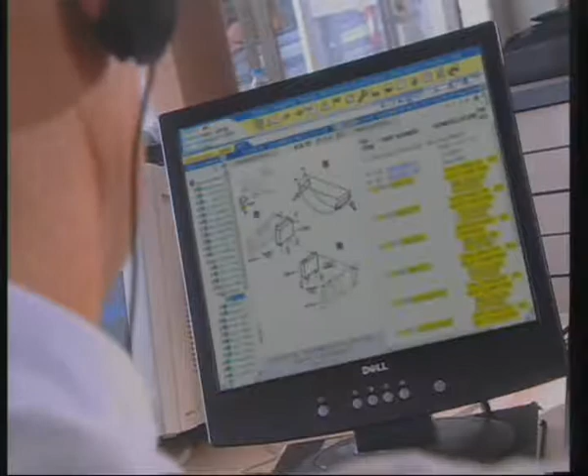Delays and cancellations can be minimized by utilizing proper troubleshooting techniques and the efficient use of the aircraft maintenance documents. The documents include the troubleshooting manual, the aircraft maintenance manual, and the illustrated parts catalog. The troubleshooting procedure begins with a logbook entry or a post-flight report.

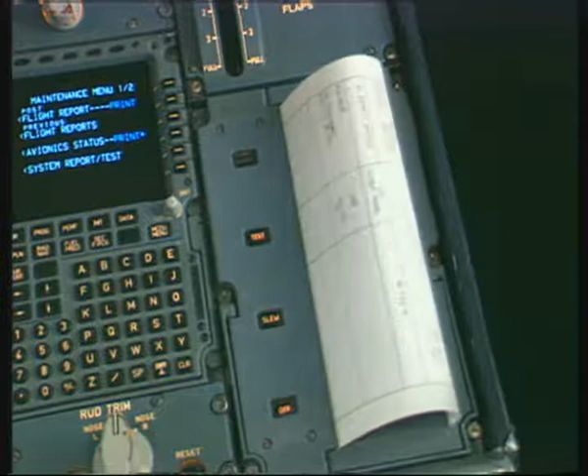The post-flight report data is presented in two different formats. The wide-body aircraft data is displayed in a horizontal format. The post-flight report data for the single-aisle aircraft is printed in a vertical format. The post-flight report identifies the aircraft and flight number.

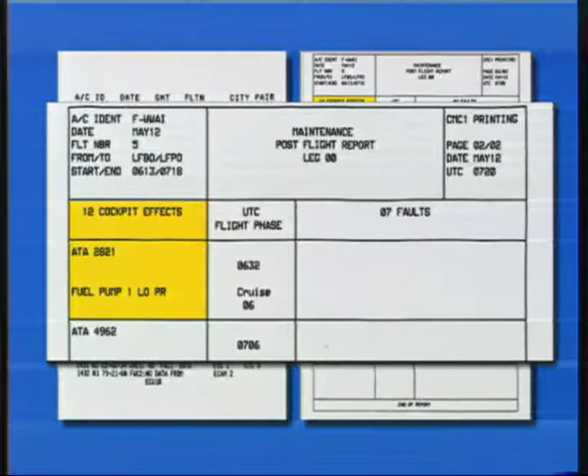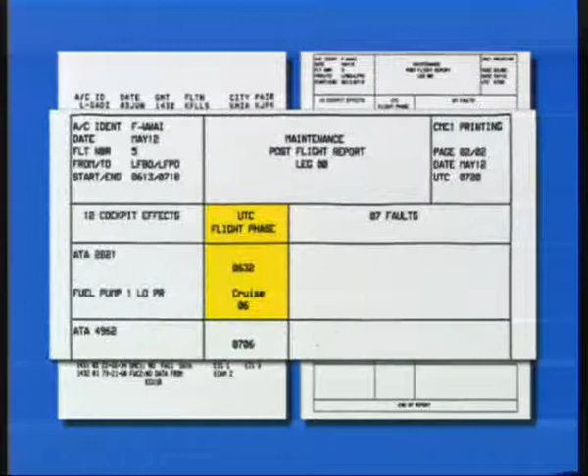The fault data includes the cockpit effects, which identifies the ECAM warning and the troubleshooting manual entry reference, the universal time coordinated and the flight phase in which the fault occurred, and the faults which were detected by the Central Maintenance System computer.

The CMS fault data includes the maintenance manual reference, the line replaceable unit and its functional item number, and the system component which generated the fault message. Additional systems that may have detected the fault or may be affected by it are listed as identifiers.

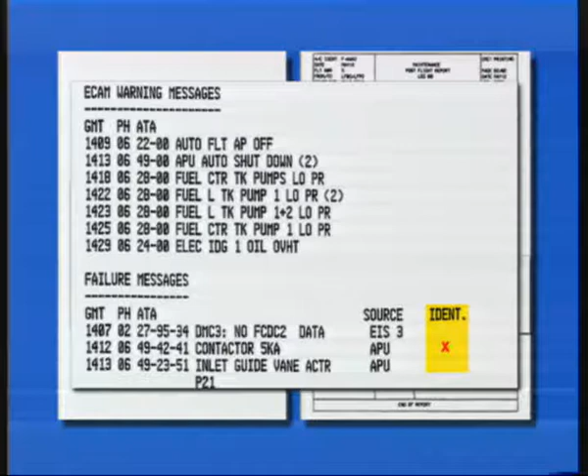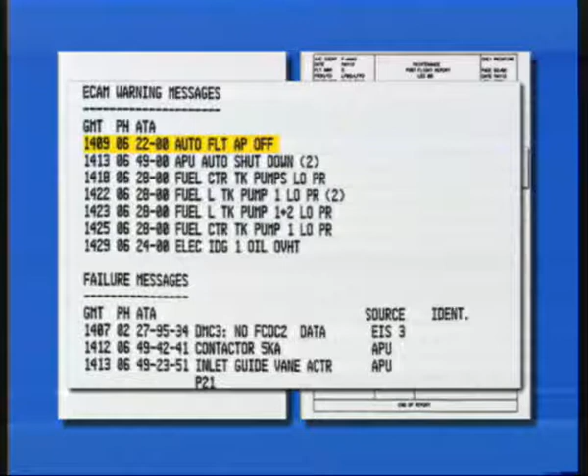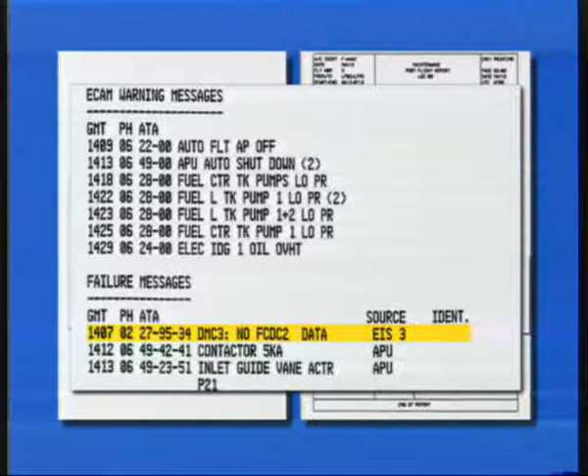The post-flight report may list a cockpit effect and no associated fault data, a cockpit effect with associated fault data, or fault data with no associated cockpit effect. The troubleshooting procedure for the single-aisle aircraft is identical to that of the wide-body aircraft.

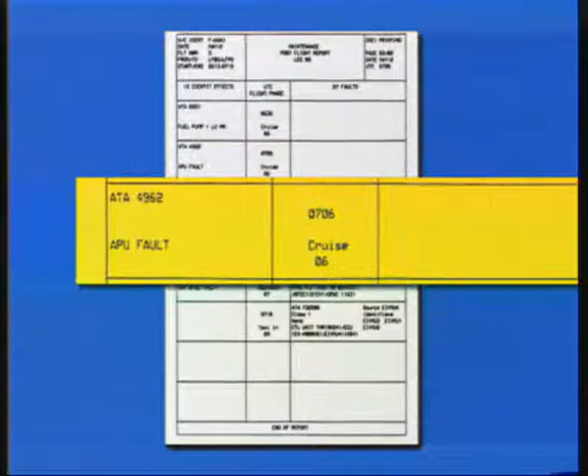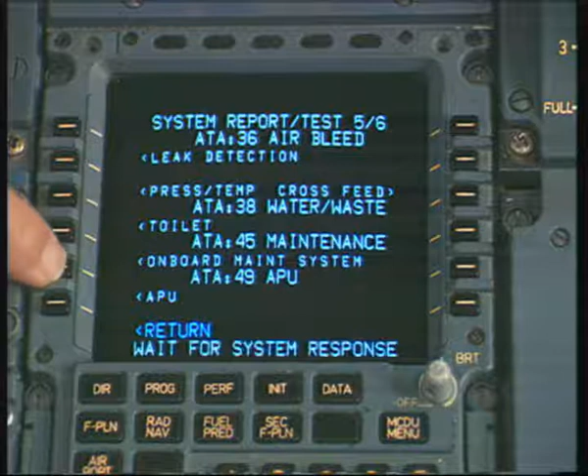The ground engineer retrieves the post-flight report from the aircraft printer to begin the troubleshooting procedure. The post-flight report contains data from the central maintenance system or the centralized fault display interface unit, which will assist the engineer in identifying and isolating system faults. The fault data is compared with a pilot logbook report. Fault data history may be obtained from the affected system computer through the use of the MCDU CMS data link system.

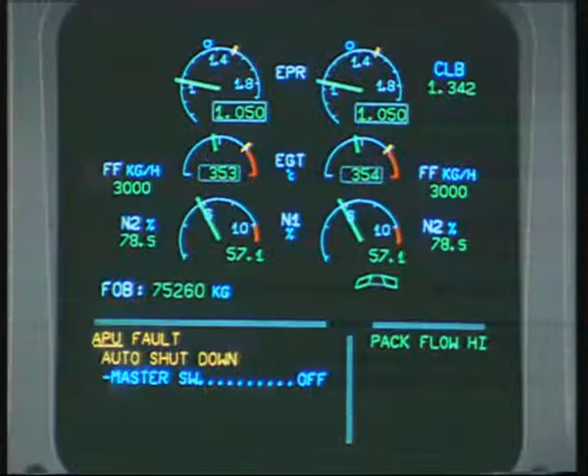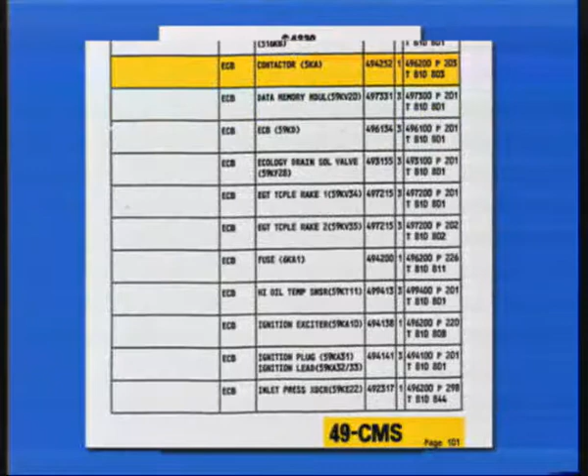The entry point into the troubleshooting manual may be determined by an ECAM warning, a fault message generated by the central maintenance computer or by the centralized fault display interface unit, local warnings or observations by the flight crew or by maintenance engineers, or by an in-op system or maintenance status ECAM display.

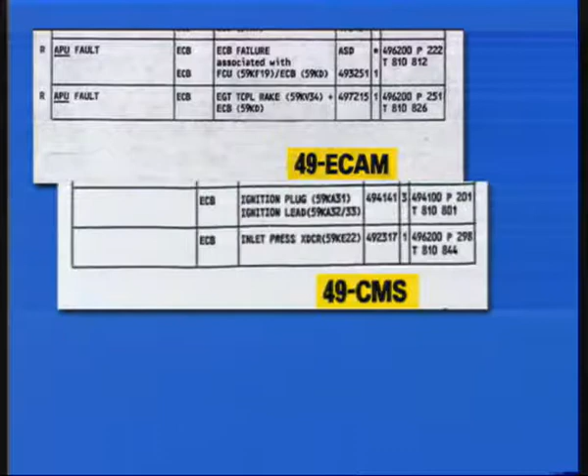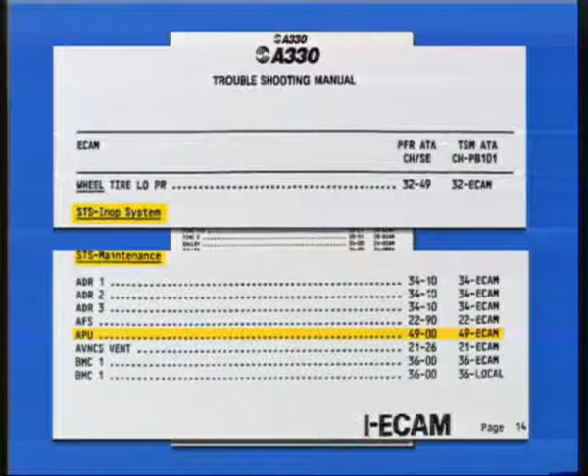The ECAM warnings, CMS fault messages, observations and status messages are listed in their respective troubleshooting manual index. The index directs the engineer to the fault symptoms sections located in page block 101 of the relevant aircraft system. Page block 101 ECAM section contains the list of ECAM warnings, identifies the source of fault messages and correlates ECAM warnings with associated CMS fault messages.

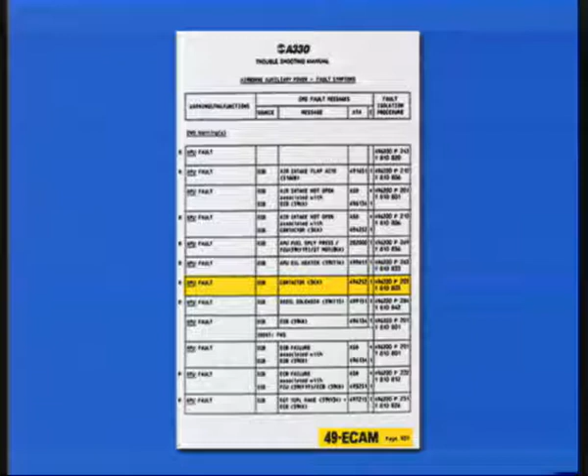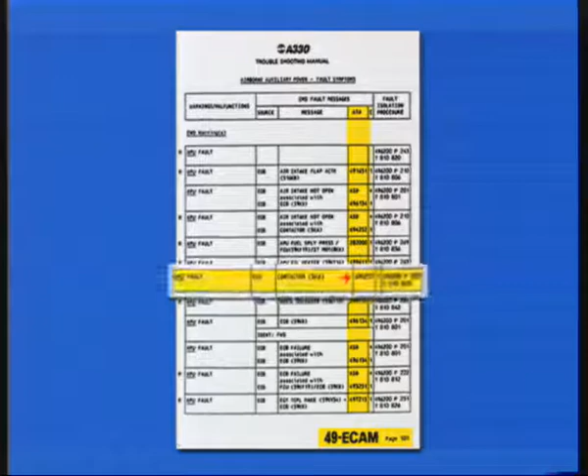The suspect failed components are listed and identified by their functional item number. The ATA reference number represents the maintenance manual reference for removal and replacement of the failed component, and the illustrated parts catalog reference for identifying replacement parts. The fault class or level may be a 1, 2, or 3. The fault class may determine the dispatch status of the aircraft.

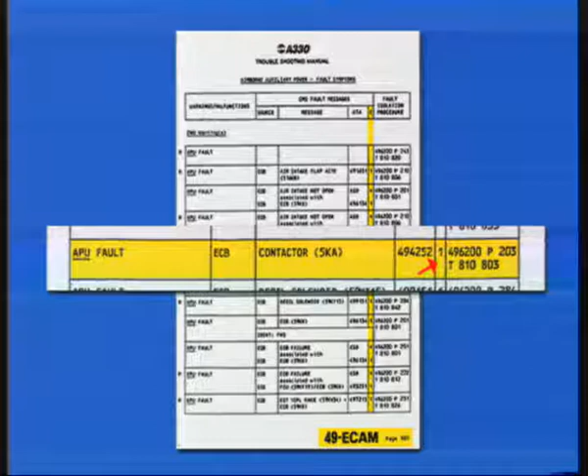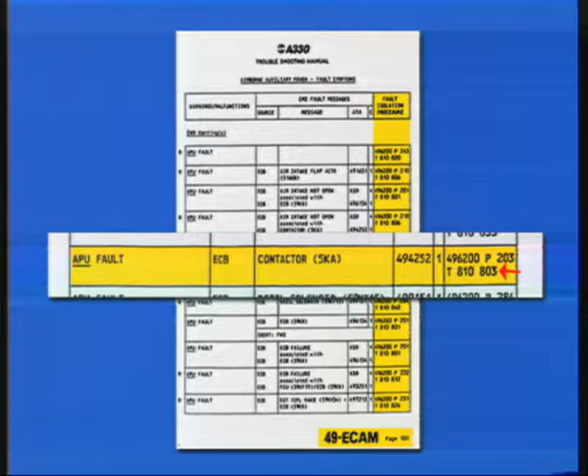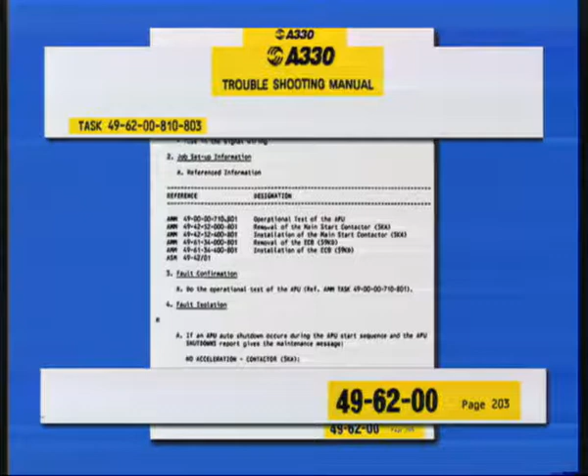The fault isolation procedure column includes the troubleshooting manual reference and page number, and the fault isolation procedure task number. The fault isolation procedure and task number are found in page block 200 of the troubleshooting manual. This section contains a list of possible causes for the failure, job setup information, the fault confirmation procedure, and the fault isolation procedure.

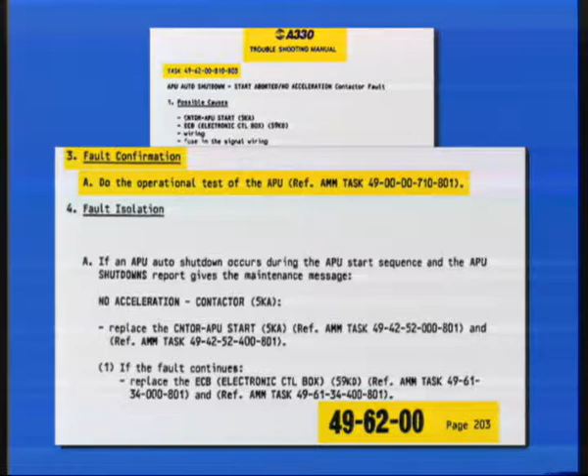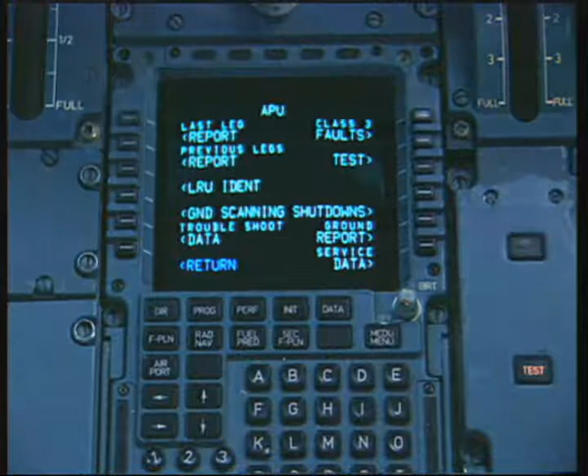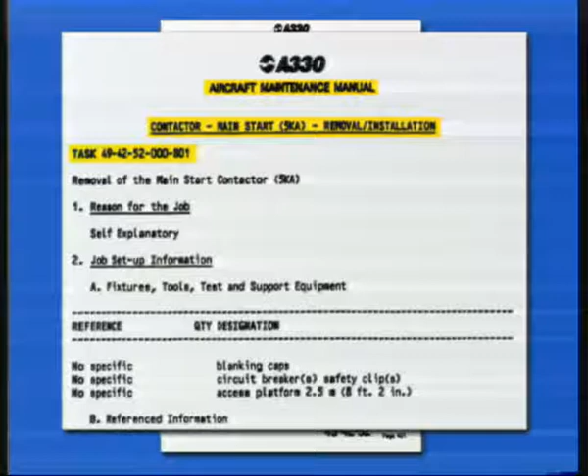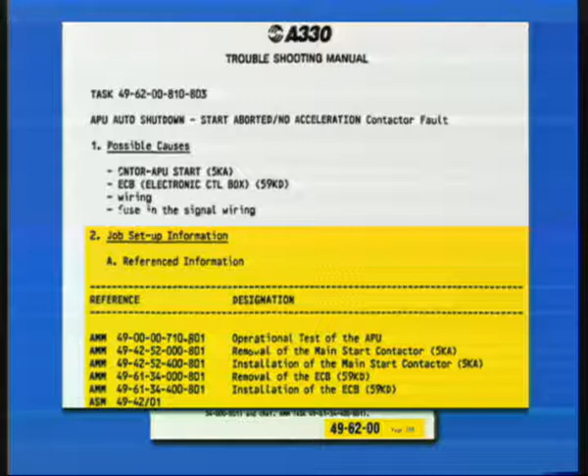The procedure may require a test of a system or line replaceable unit. If a test is required, the result is used to determine the next step in the troubleshooting procedure. If the test indicates that an LRU has failed, it is replaced in compliance with the aircraft maintenance manual. The job setup information section of the troubleshooting manual includes a list of the tasks necessary to complete the removal, installation, and the test of the line replaceable unit or the system.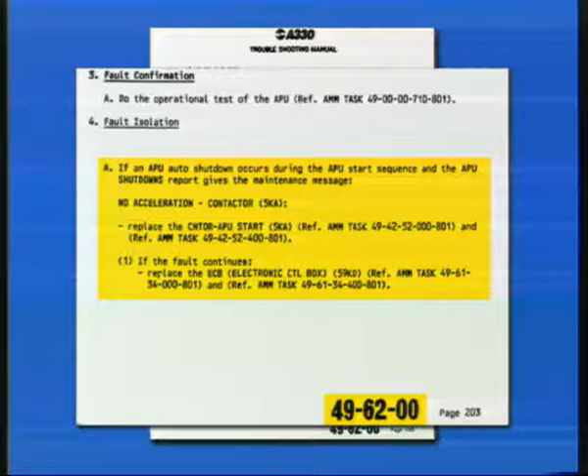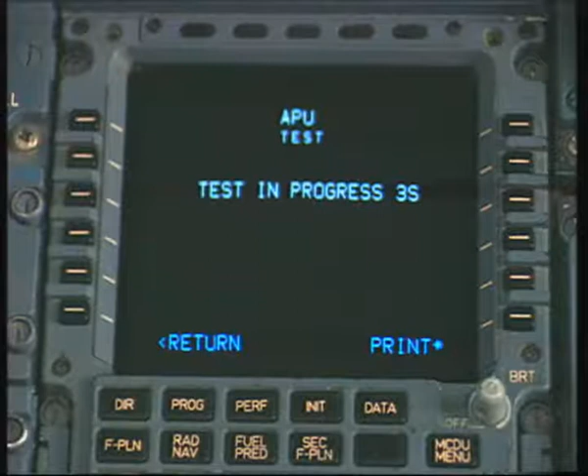If the test results indicate a failure, the additional fault isolation procedures listed in the troubleshooting manual will be accomplished. If the test is satisfactory, the aircraft can be returned to service. The completed task is recorded in the aircraft logbook. The portability of the laptop computer provides the ground engineer with access to the manuals and documents required to troubleshoot while on board the aircraft.

The APU discrepancy has been corrected and noted in the logbook. Great. It looks like we can depart on time after all. Sky 7, position and hold. Trans-East, taxi runway 9 left. Air 1, clear for takeoff. Contact departure control. Frequency change approved.